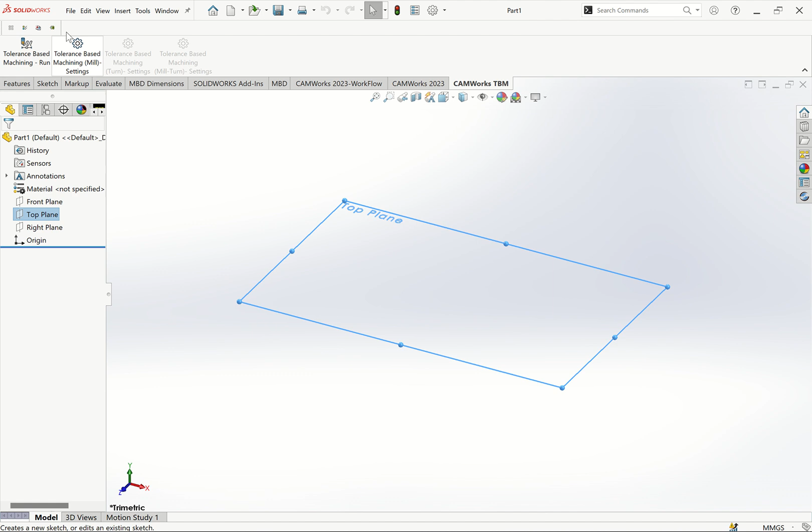Once you open your SolidWorks, I'm using SolidWorks, that is the software I'm using for design. Quick way, just file, new part, or shortcut, click Control N. SolidWorks is able to do part modeling, that is 2D and 3D modeling.

You create 2D sketches, and then you convert to 3D sketch, then 3D models or features. Then you're able to do assembly from part modeling. You're able to create a 2D drawing from either part or assembly. But now we're doing part modeling.

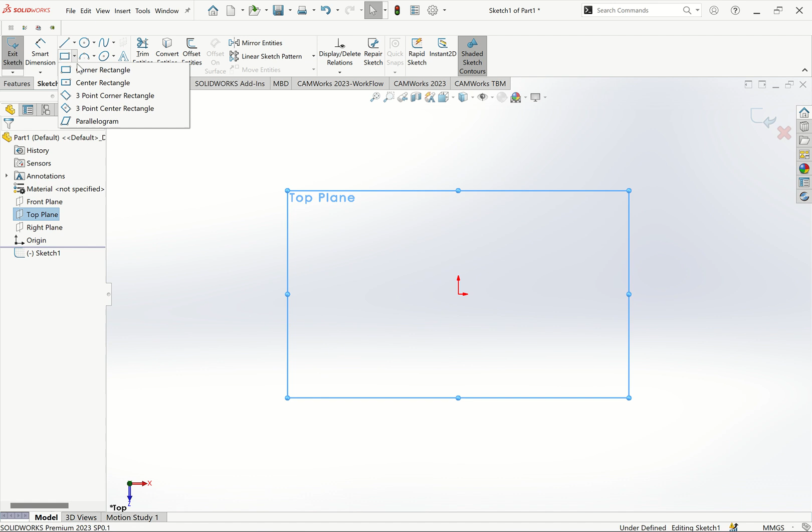Click on top plane sketch. We want to do a faster way of creating our part here, so let's put dimensions very quick using smart dimension. Here we put 1200, that is in millimeters, by 600.

You can put a simple support here. Simple support is okay, you can exit this.

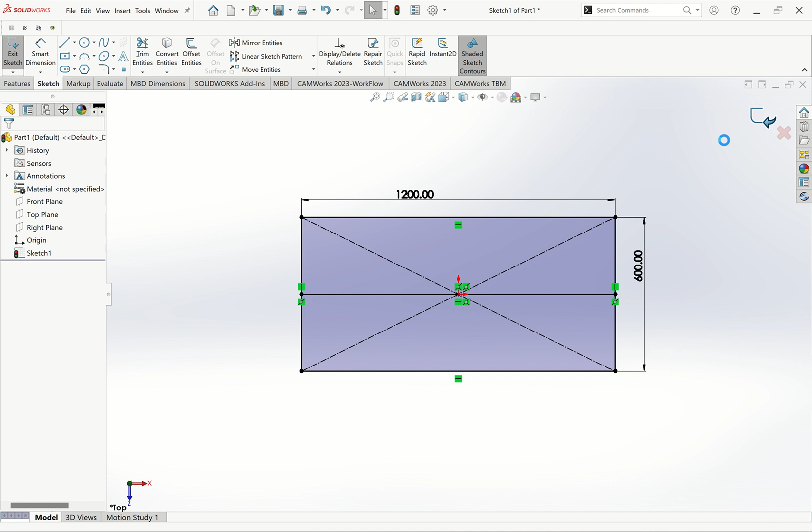That's the 2D sketch. Then you go to 3D sketch, combining them. Come to sketch again. First of all, once you finish here, make sure you click to exit from the sketch. Then Control 7 to see this is our sketch. Then go to sketch again, and down here under sketch, click 3D sketch or select 3D sketch.

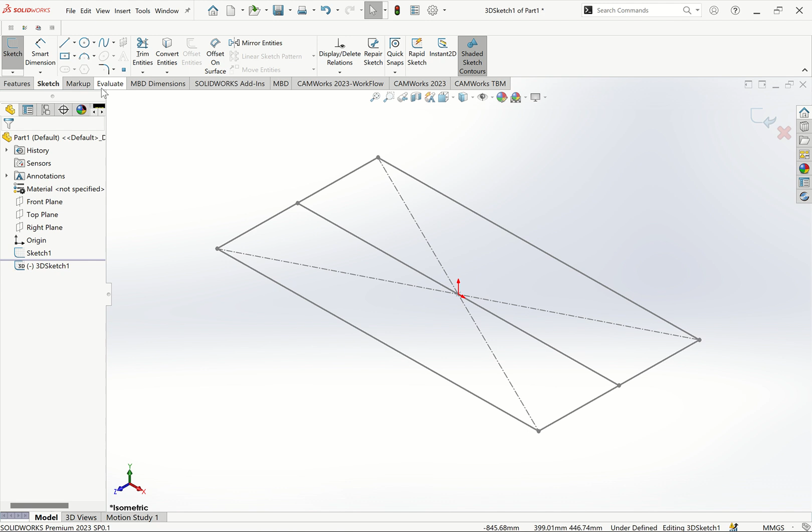Then take a line. I told you we want to use 2D sketch and 3D sketch combined to create a simple table frame, and then we see the power of SolidWorks, how SolidWorks is very powerful.

When you're using 3D sketch, you can click on the point you want. You take a line, you click on the point you want, and use the tab command to change the orientation of the line or the sketch.

So click on this one, this one, hold on Control, I want to make them all equal. Hold on Control, select this, select this one, select this, select this one, then release the Control button. Then pick this one as equal.

Press F button, take smart dimension. On this, you can put the height 700. This is a start table. Then you can put a support for the start table.

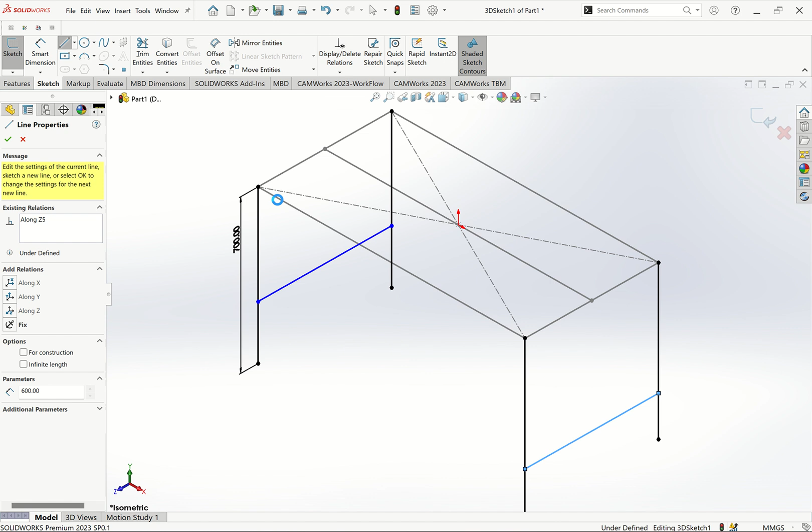Maybe click on this point, any point, then ensure you tap so it goes this direction. And pick another one this side, maybe from here, let it go this way up to there. Then the last one, maybe from here, you can tap, yeah, like this, it comes here. So you can smart dimension our part from this far end to this far end.

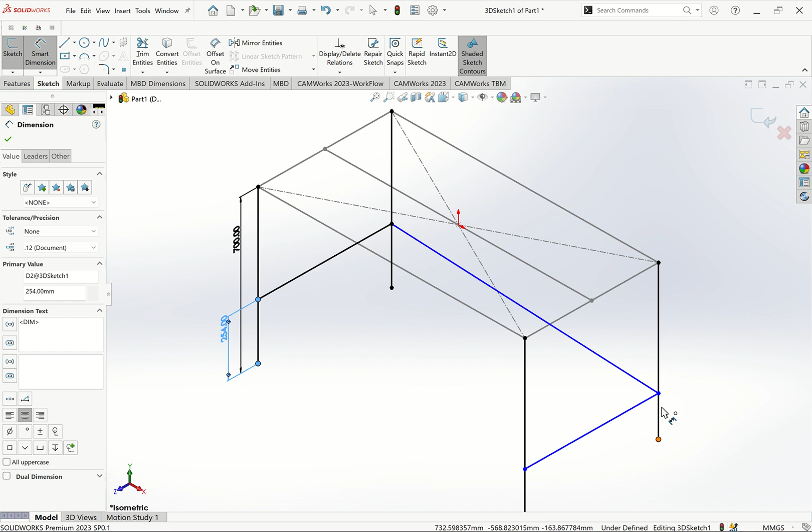You can put it like 254, from here up to here, the same. You can put 254. So your sketch is fully defined, you see here it is now fully defined.

Then what you do is just exit. So you have combined a 2D sketch and 3D sketch, that is making a table. Then we need to go to...

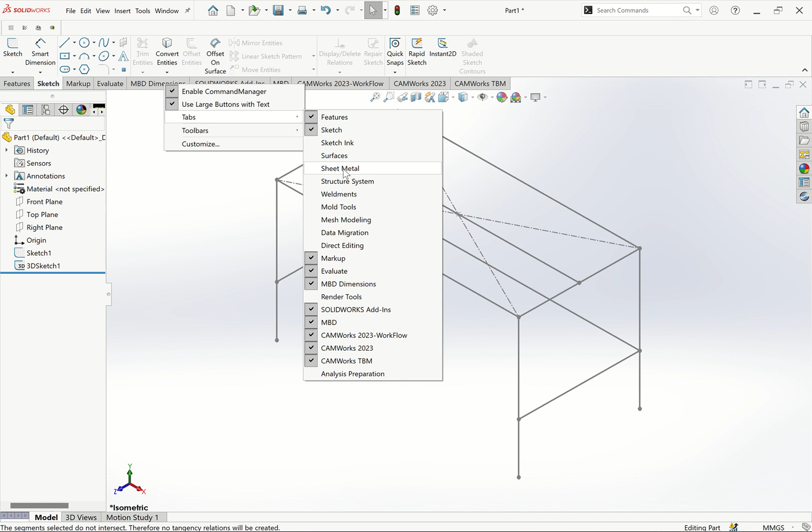Weldments, it's not here, that's structural. So what you do is place the pointer here, right click, then say tabs, go to sheet, that is Weldments. We're using Weldments. When it comes here, you click on Weldments, or you click on Weldment again, then structural member.

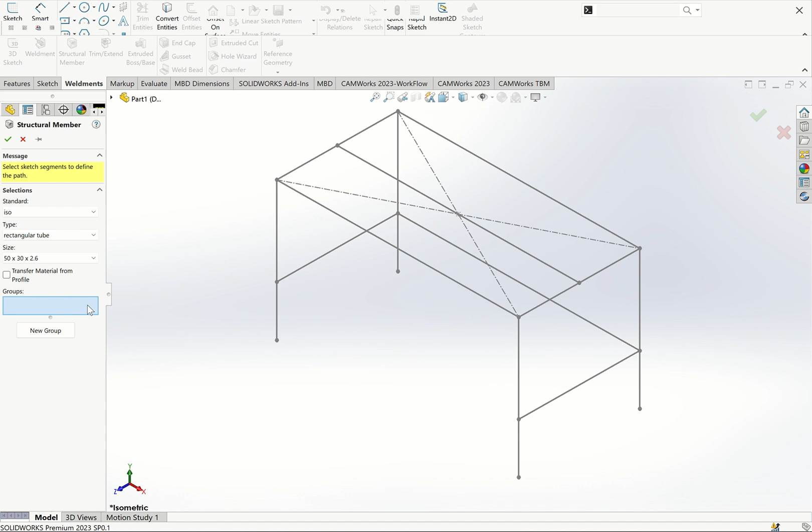Check the orientation, so this is the orientation. If you don't want that one, you can rotate. You click here, then change the angle, maybe 90 degrees, you see, then click new group, add this.

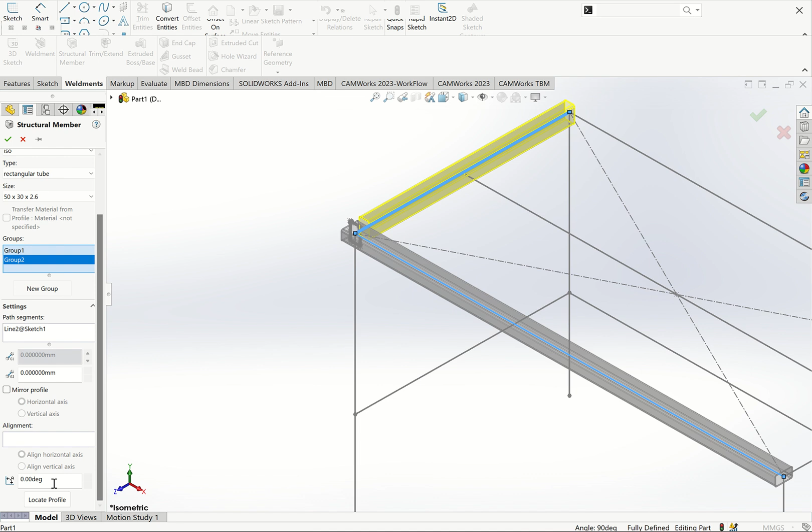If you don't want the angle the way it appears, change here to 90 degrees, like that. New group, so that you create a cut list. Change this one, change orient it to 90 degrees, like that.

Then the last one, new group, pick on this, like that. You can also change to 90 degrees, like that. Okay, then you can pick the lower one.

This welding table should be strong, can you click new group? That's why I put this support. Then this one I can also change the angle, I can put 90 degrees, like this. So you see how it appears.

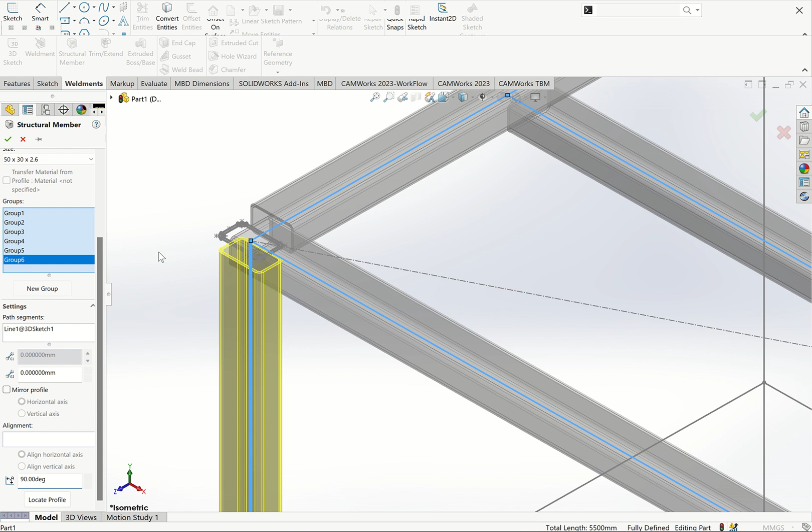Then you can put new group for the legs. You want it to appear like this? It's not good, maybe I can change the angle to 90 degrees. That is good. If I want to see it, Control 5.

I want to see at this corner, how does this corner appear? If you feel it doesn't appear the way you want, what you do is first treat these corners. Click on this far corner, then you can use this arrow to trim the far corners.

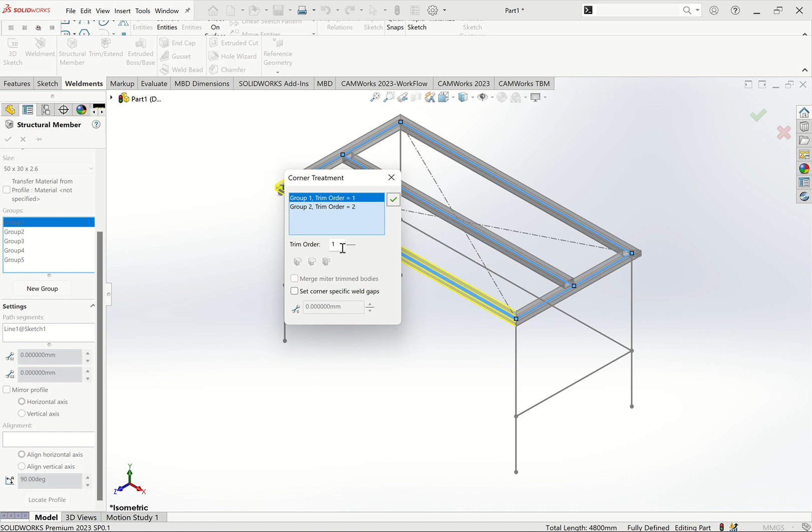You can use this arrow to trim the far corners. We call it corner treatment. Use these corners to treat the corners. We have this, so click on new group, then pick on this handle.

Before you change, Control 5. Check if you want it to be like this or you want to change. For example, if I want to put 90 degree here, I click this, it changes like this. So I want to fit it there. Can pick another one.

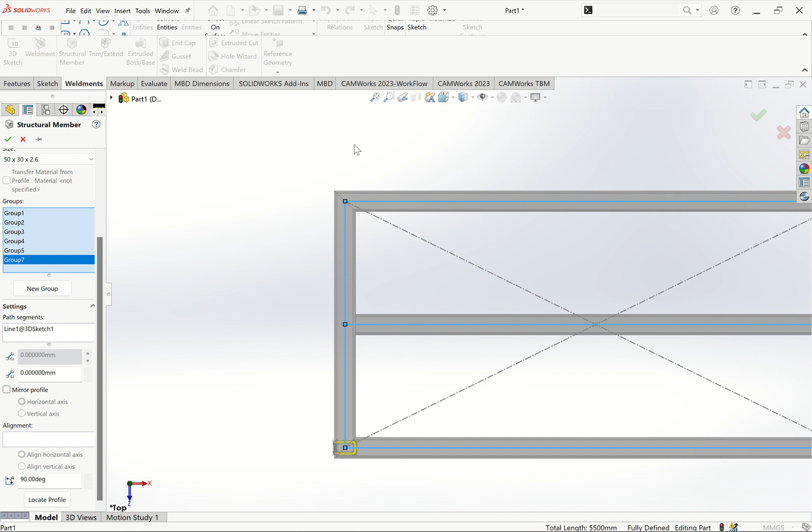Control 7, new group, pick this one. I want to see how it appears. Control 5, top plane. So this, I want to also change this one to 90 degree. It goes inside like that.

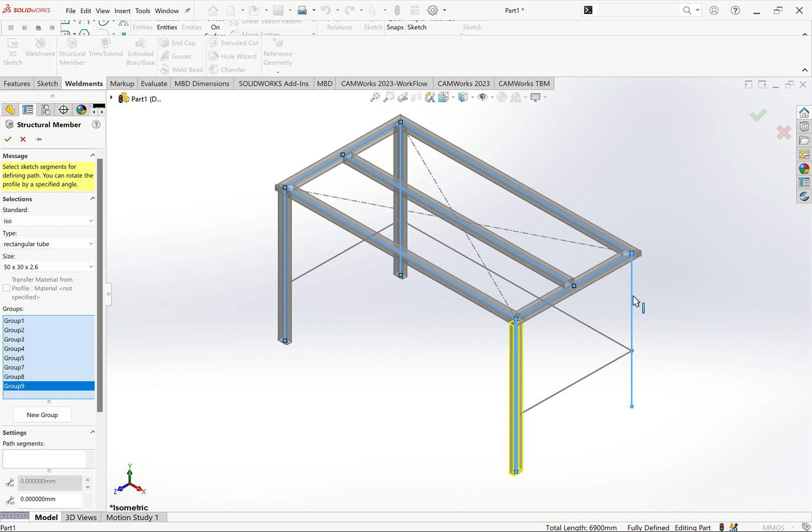Control 7, I want to change a new group, this and this. When we combine them, Control 5, I want to change this one to go inside the 90 degree, like that. Control 7, so I can put another new group.

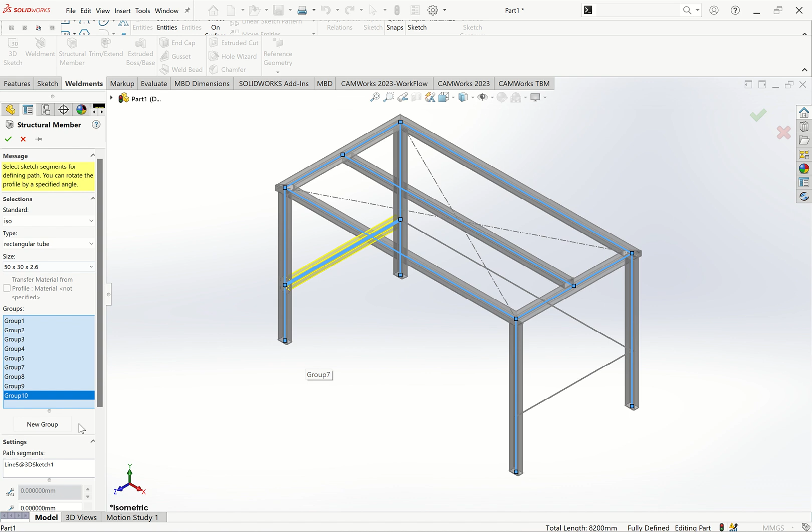Control 1, so this one is okay. I need to rotate. New group, this, Control 1, this okay. New group, this one, Control 2, 3, it's okay. So you see this one is okay. Then once okay, click OK.

I'm able to hide this sketch, these sketches, I can hide the sketches. And then now this is our table. You can check if it is well treated, each one of them, if it is well treated.

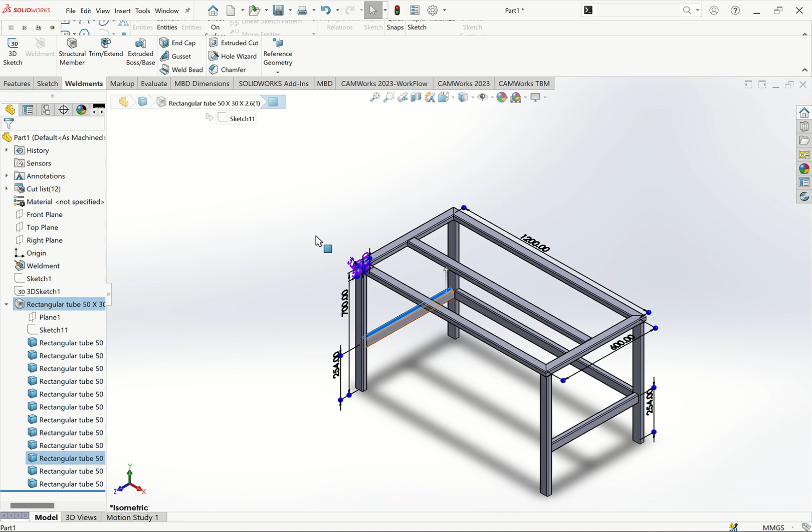For example, if I want to add other features here, I can come to my 2D sketch, so edit the sketch. I can add another sketch here. This sketch, I can add another sketch here, for example. Maybe let me put a simple sketch here. I'll show you, then another sketch here.

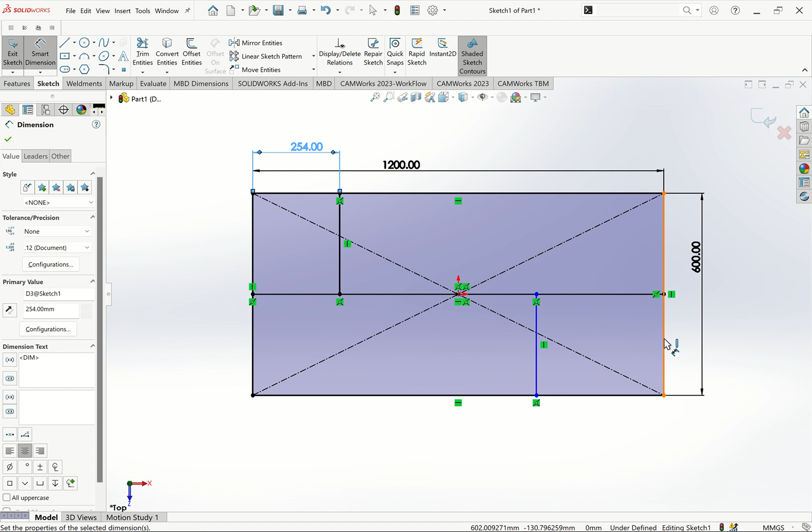There's a reason why I want to show you this. This is a very good trick. So this is 254. Also this is 254, that is 10 inch. 254.

Exit. Okay. Once you exit, it doesn't come here, so unless you show it, click here, show. The sketch will come. And then I want to add something here. Then I show you how to trim. So what you do, click here.

Structural member, I want to use a square tube of 30 by 30. Yes. Then click on this. Then this one and this. Click OK. Then come here, hide this sketch.

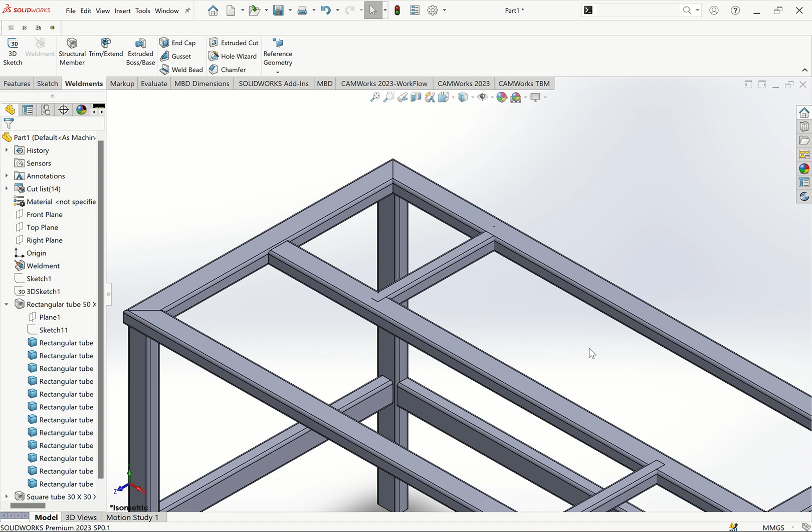You see, this part, it's elongating inside because this material and this material are not the same. This is that square tube of 30 by 30. This is 50 by 30. If you look at this one, is protruding inside.

So what do you do? You come to trim. Then I want to trim this one, but I want to use bodies. So click on bodies, then pick this body and pick this body. So I want to cut. This is the one I'm keeping. Yeah, I'm keeping. If you click this, it removes.

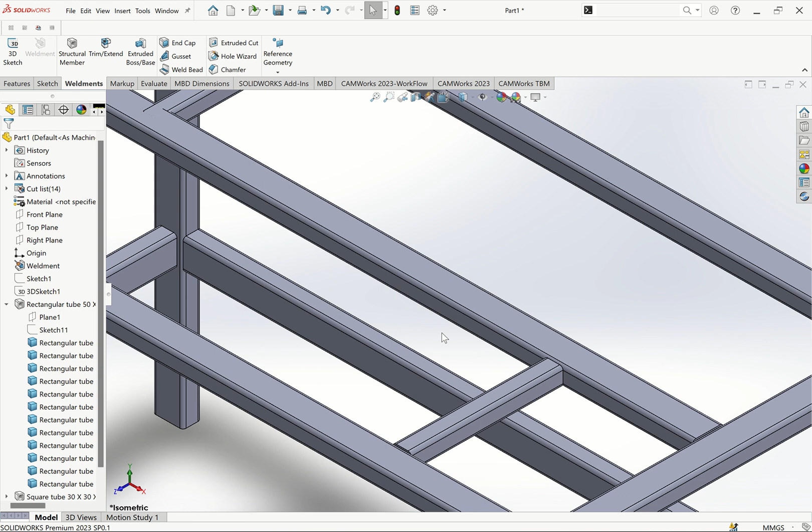But I want to keep this, so you click there, you keep. Click OK. You see, now it has cut the joints. You can also come this side, trim again. You can pick this what I want to trim, change to bodies here, pick this body, and you click OK. So this, it has created what we call a cut list. This is a cut list.

I'm able to put at the top, at the end of it also, to prevent it being sharp cut in the floor, I can put what we call end cap. These are the end cap. Put end cap, click on this face, and end cap.

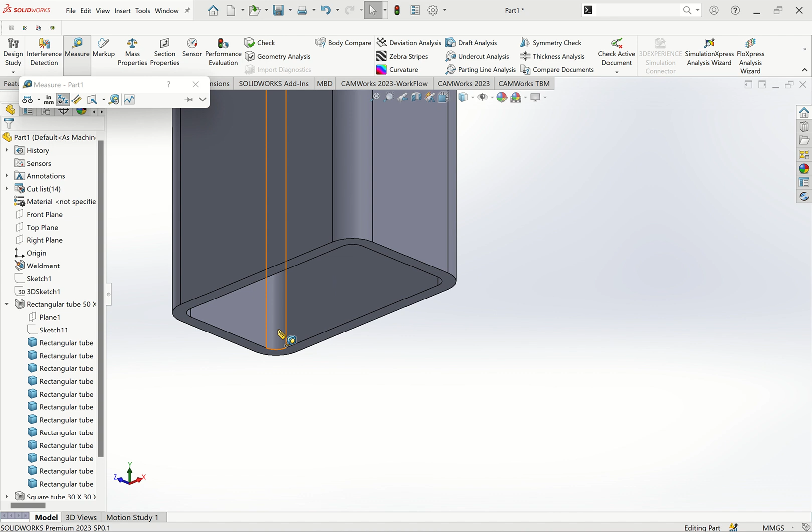Maybe if I put end cap, I can do symbol evaluation, measure this radius, and put it 2.6. So I can just come to Weldments, end cap, pick this region, then I say corner treatment, fillet of 2.6 to be inside. Then I can change this one to be inside or this.

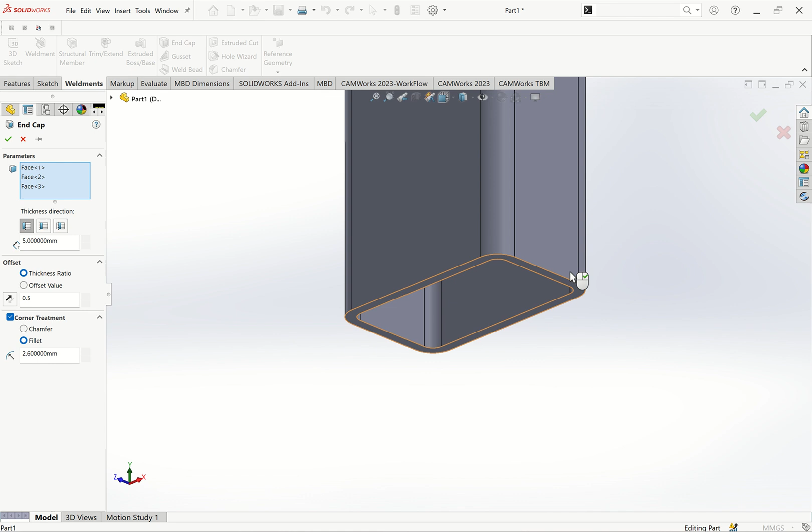So either way, that suits you. So in case you want this one to flash out, okay. So let me use the flashing out. Then you can also change this, pick these ones, all of them, one by one, until I have the end caps. Yes, pick this and this.

Okay, I can also apply material. Come here, edit material, apply material. I want to use alloy steel. Apply, close. Then you can save your table frame.

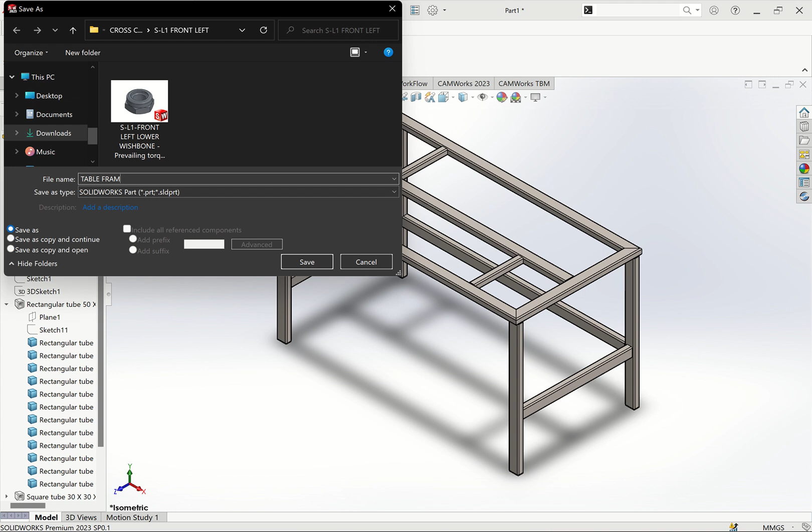Okay, so this is our frame. So we have done a design. So in case you want to add wood on the other side, you can do that one. That's what I wanted to show you, how you can combine 2D sketch and 3D sketch and then you design.

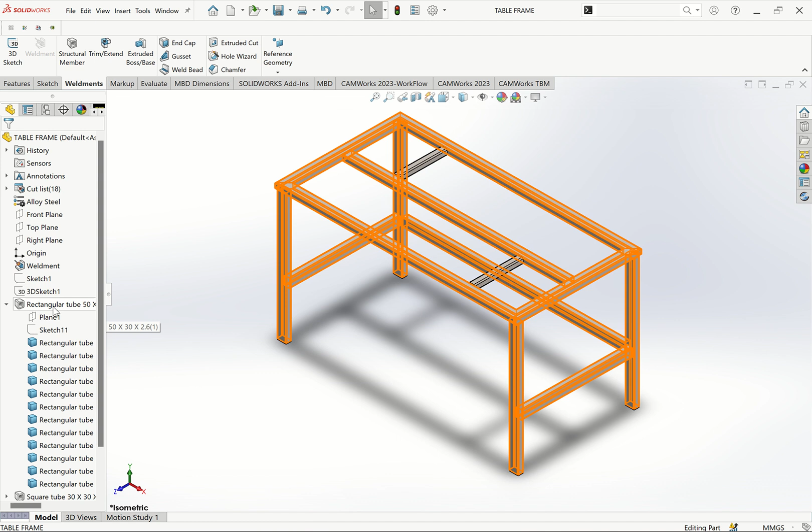Also, this structural, if you look at this structural, what you have done, for example, you click on structural member. Here, for square tube, let's say for rectangular tube, we only have this size.

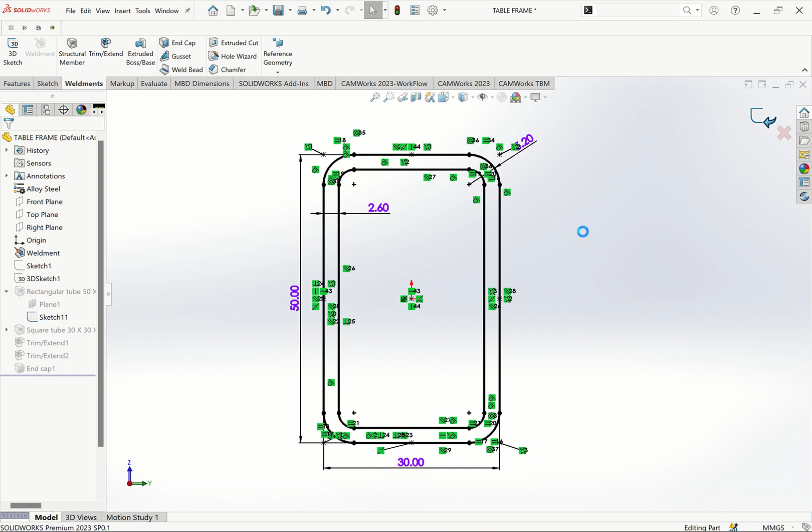In case maybe you only have 75 and maybe 50, it's not there. What you do is come to this sketch, then click edit. You put your dimensions. This is the profile for rectangular, we call it RHS, rectangular hollow section. So you can change this 75, you can change this to 50. Then click exit, and it will just update the dimension all across. So this is the part of design.

From here, I can also do an analysis. For example, let's do a simulation. We'll see what an analysis looks like. We want to see how this will behave in case I'm going to put a load of maybe 10 Newton or 20 Newton. Let me check the simplest way I can do an analysis for pressure or for force. If I assume I'm not using a beam, I can do a simple analysis to see how much it will behave when loaded. That is what I'm going to test after finishing our simple structural design. That is the beauty of SolidWorks.

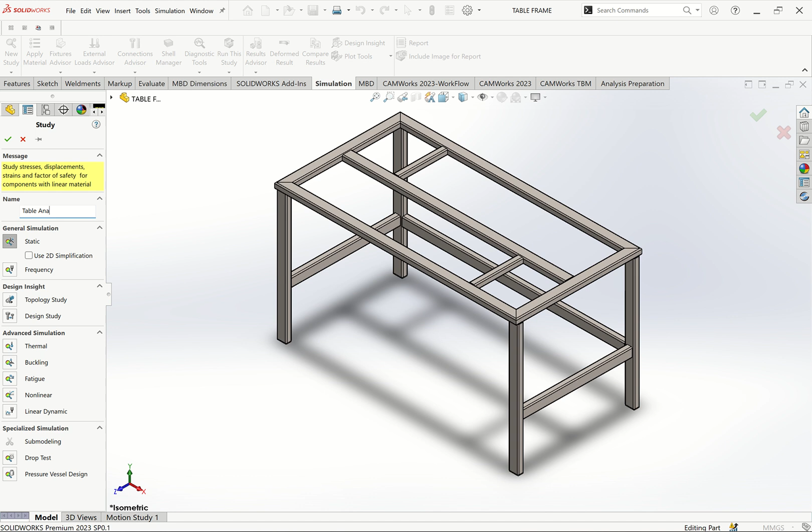Okay, so let's go to simulation again now. I think it's still loading because I've just activated simulation. So let's go to simulation, then click new study. You can use an advisor. I just want to say table analysis, stress analysis.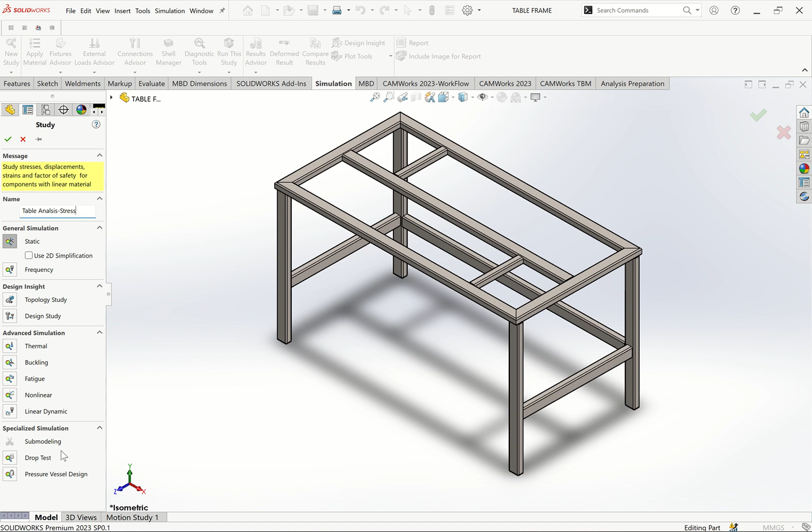In this analysis, you have 2D, I can use 2D static. You can use thermal analysis, buckling analysis, fatigue, nonlinear, linear dynamic, submodeling, whatever. But I want to use static analysis.

Then click OK. From there, we know you have applied the material. So the first thing is you need to apply a material, but already you have applied the material.

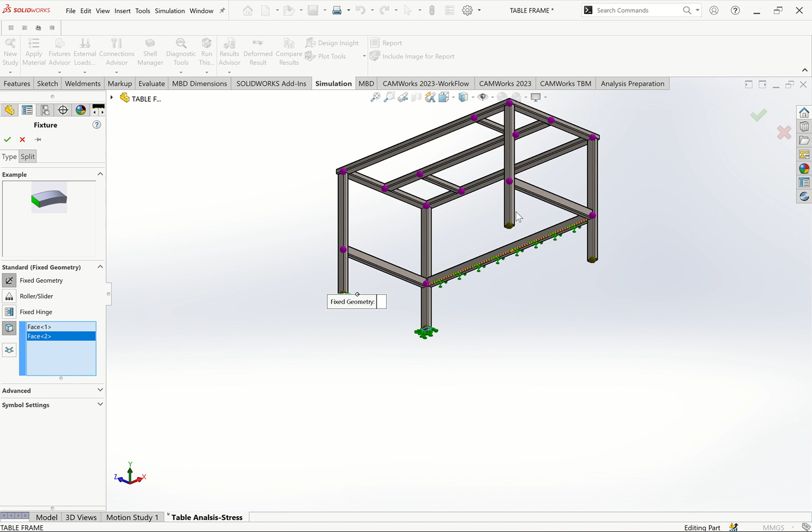So you can go to fixtures. I want to support the lower side so it doesn't move. This is the place I want to support, and this is the place I want to support, and this is the place I want to support. Okay, then I click OK. So the table will be standing on the ground, so the support is on the lower side.

Then I can come to load. I can use force, so I don't pick the beam, or I can use pressure. Let me check pressure.

Normal face, I can use top plane. Reference geometry, let me use the top plane. Reference geometry, top plane. Then I want along which direction, maybe direction 2. You see, if direction 2 is going this way, let me check direction 1. Direction 1, direction normal to plane. Normal to the plane would be like this. So direction 1, like this, is not good for this part.

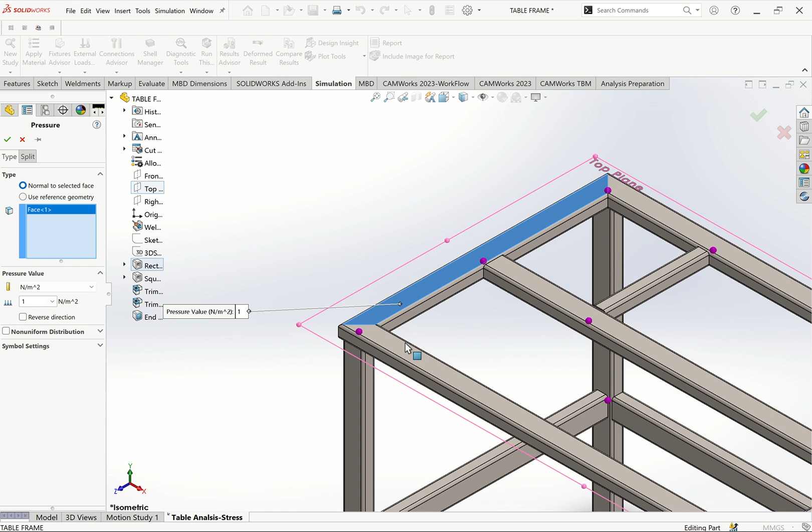Select faces, I want to take these faces, these faces. I want to ensure that the forces align on this. Pressure is being exerted on these faces. Yes, like that.

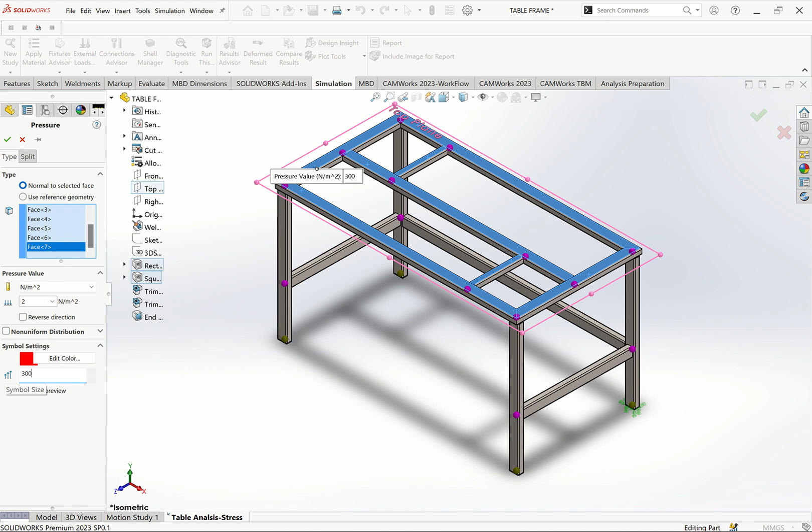Just let me use 2. In case I wanted to change direction, I can also reverse here. Then I want to mark a factor of 300. You can see the force, yeah 300, it's too big. 200. Okay, 200 is okay. You see, that's why I didn't want to use pressure, because it will require me to use the beam.

But I want to do it very fast. So what I want to do is I will have to change this one to the beam, and yes, I've used that pressure. You see, pressure requires you to convert to a beam. I just wanted to use this.

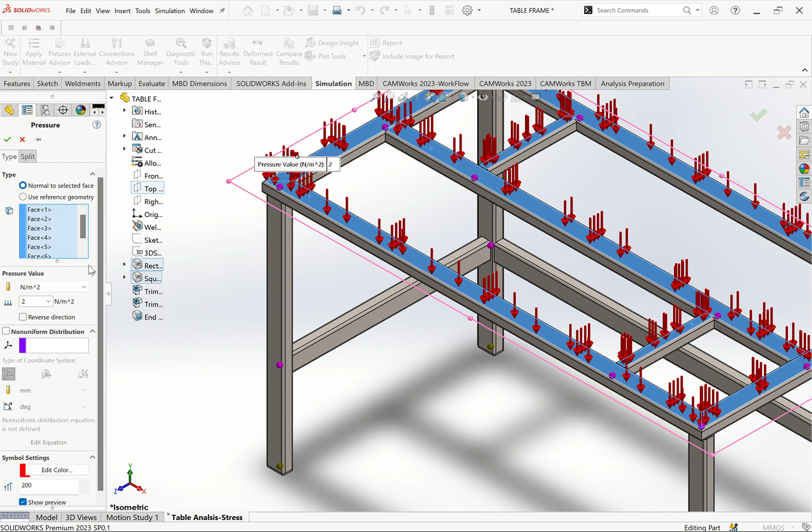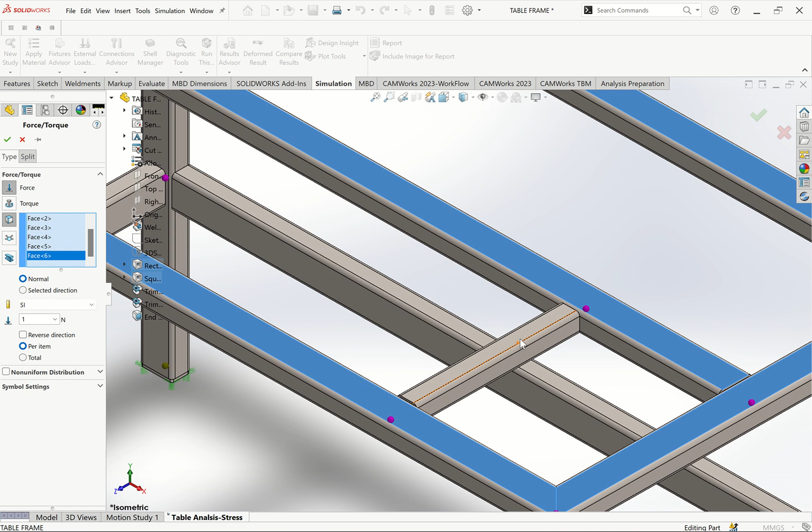So let me put the load as force so that I don't take too much time for this preview. I just want to see how it will behave. So let me use the force on these faces, not the pressure. I just want to see, in case I'm putting a 20 kg bag on this frame, how will it behave? Or in case I'm putting heavy machines on this table, how will it behave? I'm using weight, that's Newton. Let's say somebody has put 100 Newton on the frame, what will happen?

Okay, I can also expand the symbol. It's normal, you can make a symbol here to be 200. You can see the pressure, the force, yeah 200, I can able to see it. Okay, then I can put OK.

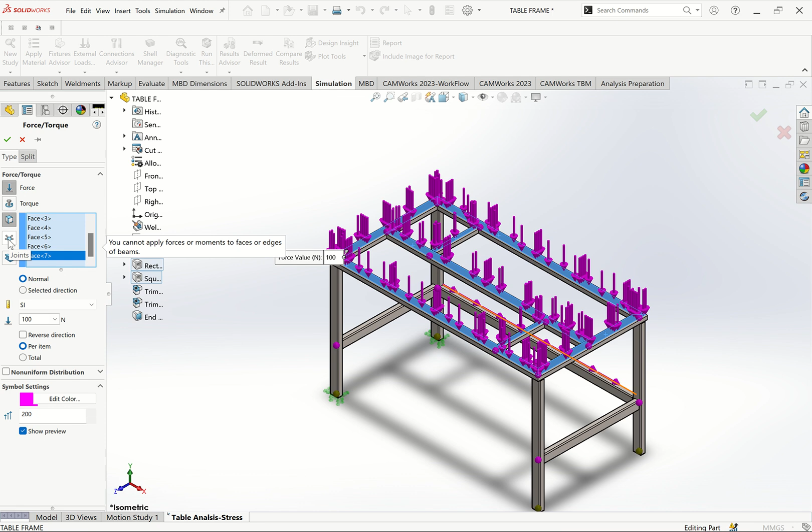Let me apply on the edges. Why can't I apply? Let me apply on the joints. In that case, let me apply on the joints. If this is the case, I can apply on the joints now, that will pick the joints to take it as a beam. So I'm applying on this beam now. It's okay, and then I want to use force.

Let's say force of 50. 50 is okay. Then I want to use this force. And then the selection is the top plane.

You see this force, it is going the wrong side. So what you do is change this, pick the other one, preview like this. So you pick the last one, preview like this. You need the last one, that is 50 force, so it should be this last one. So when you preview like this, okay.

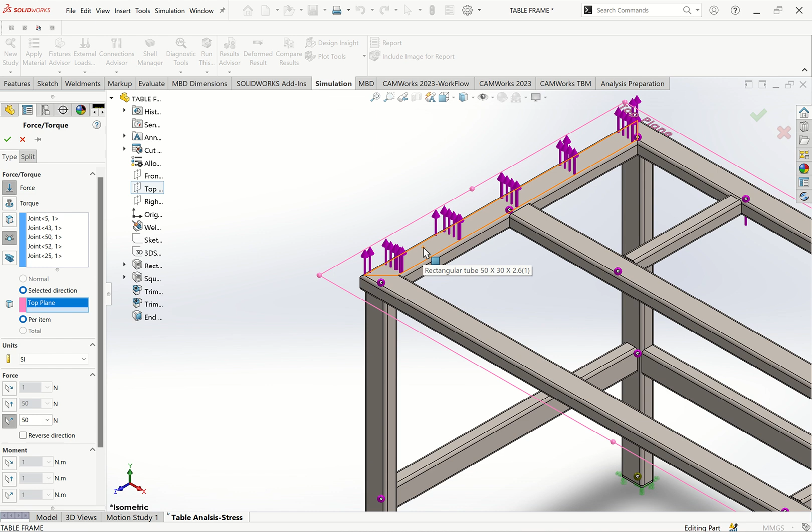Yeah, it is going down up. I want it to point down, so you can reverse here. It points down like this, you see.

Okay, then you can check that here we're using a reference plane as the top plane. Then I've put a factor of 200 to magnify my force. Can now pick OK, that one. Then from here, I don't have any connections.

What you do is I can create a mesh. The finer you put it, the slower and more accurate the result becomes. So let me mesh first of all, okay, create a mesh.

After meshing, it takes time. That's the problem with meshing, because I've put it so fine, that's why it may take a lot of time to do meshing across regions. And also remember, I've not done welding, so in case I do welding, I also ensure that the accuracy of the results increases. But let me do it first, and then I'll check, I'll add welding, then I'll see if that contact area will affect my result.

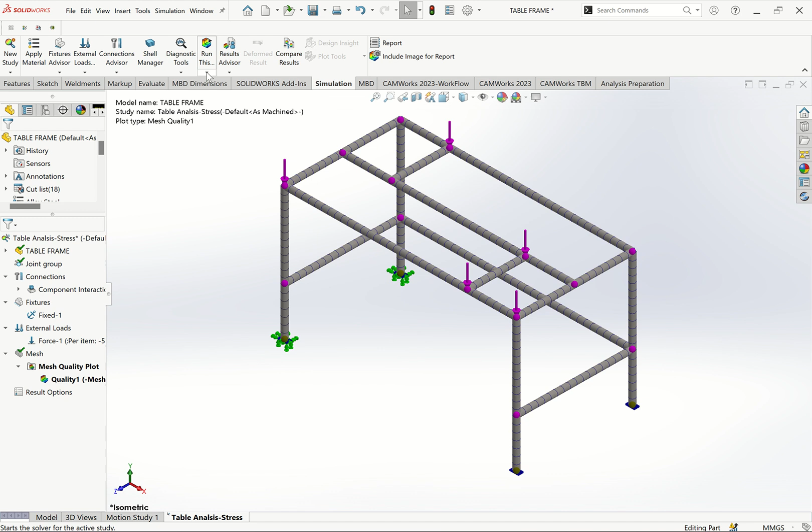Okay, then I can go to run now. Come here, run this study, click run this study. We'll be using all CPU. So let's use all CPU to run this study.

So we're using what we call the table analysis of stress. Yeah, it has finished. So this is the behavior. The material has a yield strength of 6.204, times 10 raised to power 8. That is what we have for the material.

So if you look at this chart, it tells you that every time it is changing almost to red, areas that are changing to red, it may be close to approaching the yield strength, which is very dangerous. So those areas are the ones you focus on to reduce the stress relative to the yield strength.

Okay, we can also check on displacement. For example, show displacement, this is how it behaves. You see, that's why I wanted to put this one, to see how it will behave. So here it is stronger as compared to at the center.

So this one will help me understand where I should put more support. If I animate this, I'm able to see the effect of loading, which will be more at the center than at the far end. So what I will do is at this center, which means I need to put a support at the center in case I want to confine my design to use the 50 Newton weight.

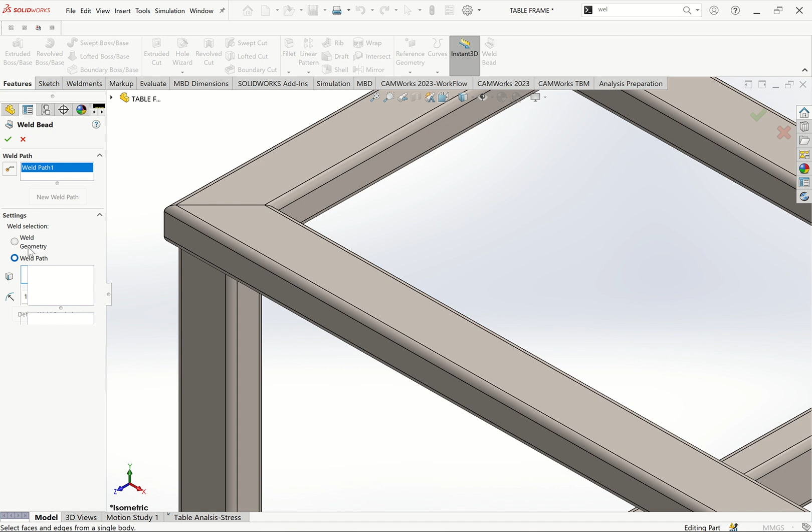So I can pick this face, yes, give a gap, maybe this face and this face, or you can use this one. You can pick this face, click here, pick this face. Then you see this is the weld.

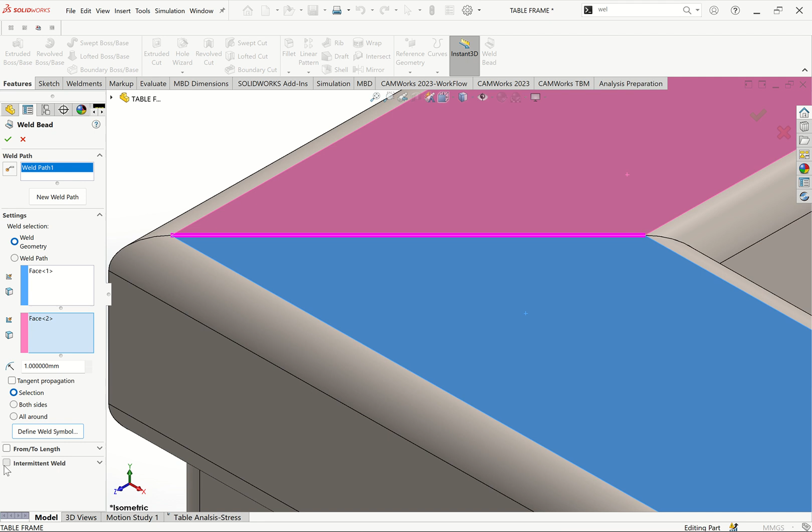So you can define your weld, if you're coming from which point to which point. You can change, you put the symbol for the weld. You're welding both direction or selection, also doing intermittent weld or normal weld. So these are part of the things you can do. For example, if I click on this, then I come to my table analysis.

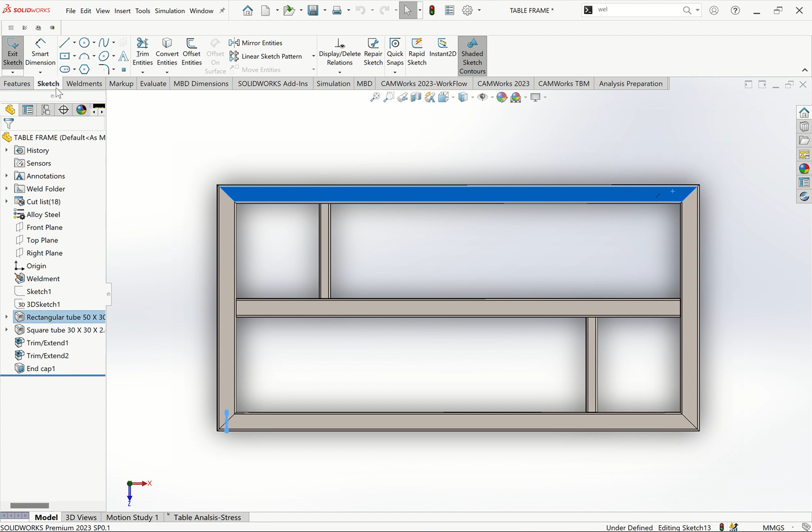I can also do an analysis again. In case I need to do any change here, let me assume I have done this, for example, sketch something on top. I want to show you what will be happening on my design.

I want to put this, maybe, for example, I can measure this one. Let me go to evaluate, measure, and measure this.

This is 1200, so I can come here, sketch 1, 2, 3, 4. So I can say from this point up to this point we have 1200 divided by 4. From this point up to this point is my dimension again.

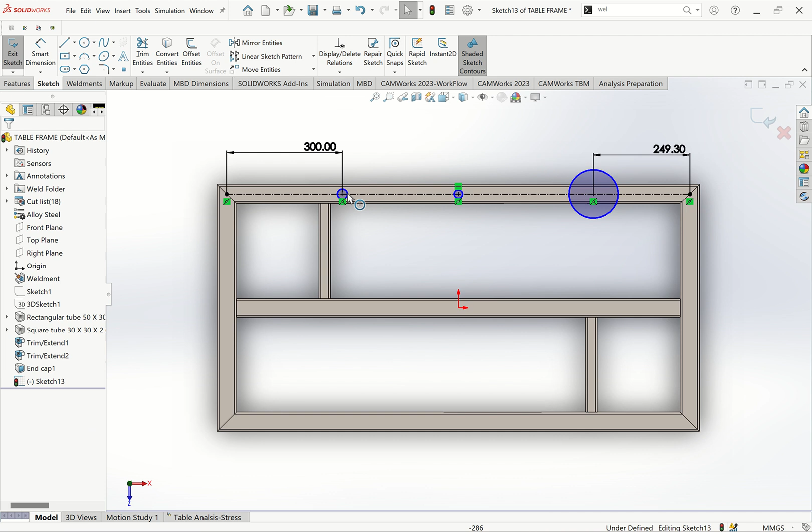Up to this point equals to this one. Yes, I pick this one to use equations. This 1200 divided by 4. Then this one and this one are equal. They are equal. This is the diameter.

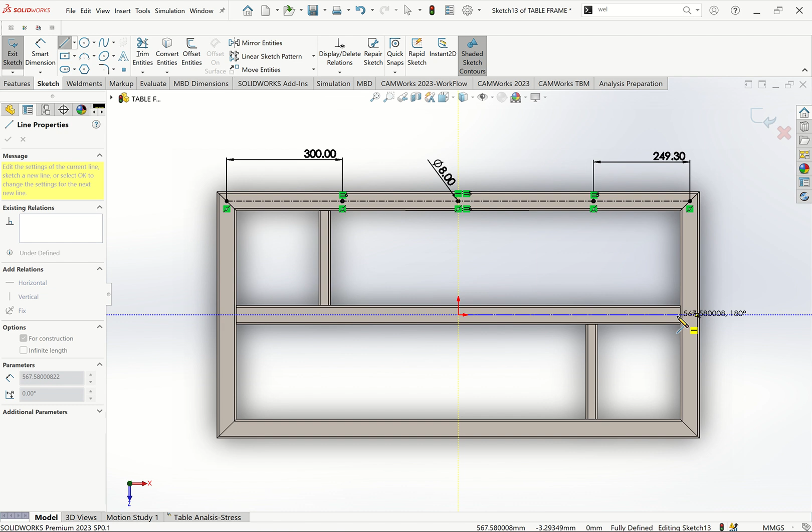Let's say diameter 8. Control 8, and put a center line here, at the center. Can click here, mirror, copy this, mirror about, click this.

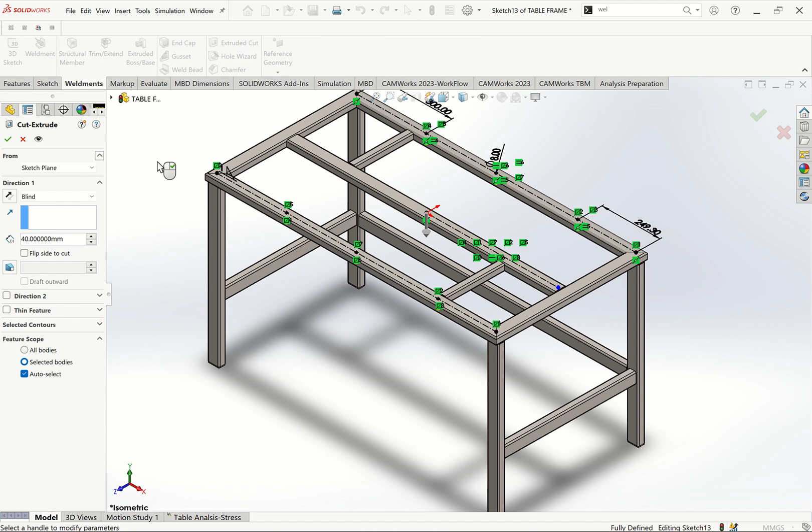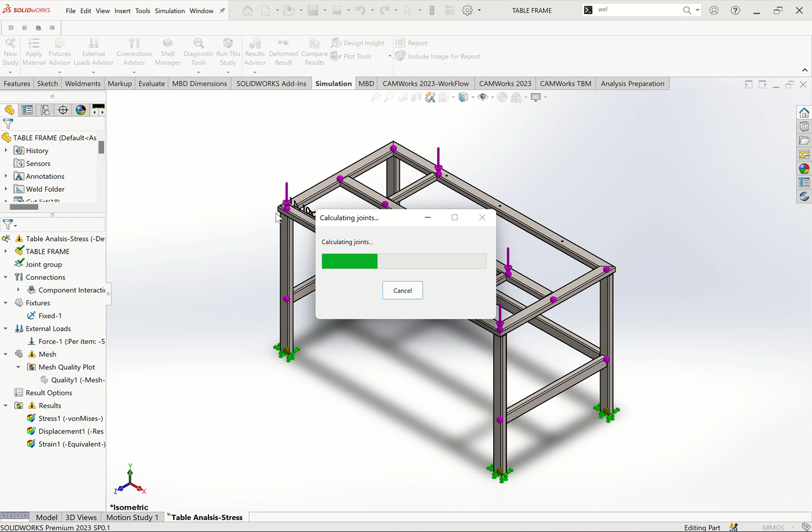Then this is now recalculating the joints. You see, it is telling you to calculate the joints. You can save or click here, rebuild, then go to your table analysis. You see, it is recalculating the joints. Then it is putting the question mark here.

Why? Because I've made a change. So what do I do? Click on this one, right click, and then say run this study or update. Can click on update or run this study. So you can update, create a new mesh, then it updates. That's how you do a design before you make the product.

But there are changes I've not made. So while I was doing my design, I realized there's some changes here, so I didn't finish those designs. Okay, so almost finishing, it's taking time, but it's almost finishing. Don't worry, because I've put fine here so that it can give me the result I want. Okay, so this is what you have obtained.

So if I show this displacement, I want to see this color. See this color now, so it's almost changing. But what do I do? So this is the area I will go in my design. I'll come in here in my design. I put a support at this center.

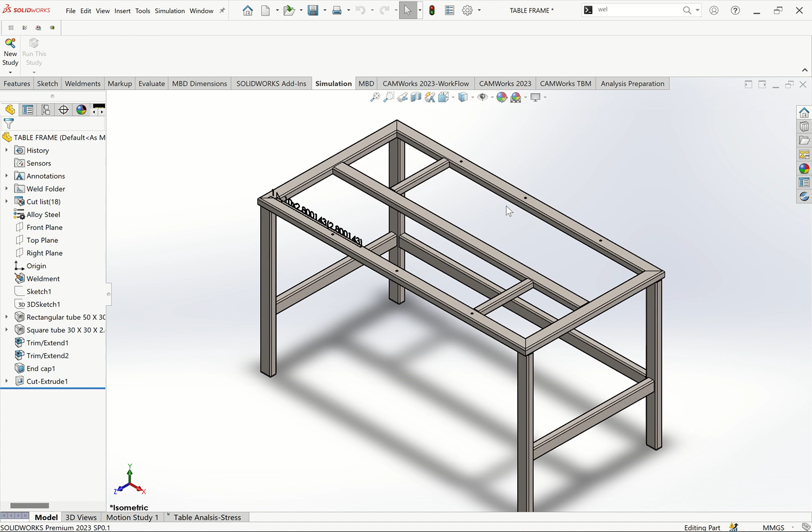Which means I can say now, edit the sketch. For example, can add this at the center, maybe this point, from here to here. I want to edit the sketch, then put this somewhere here. Put this one somewhere here.

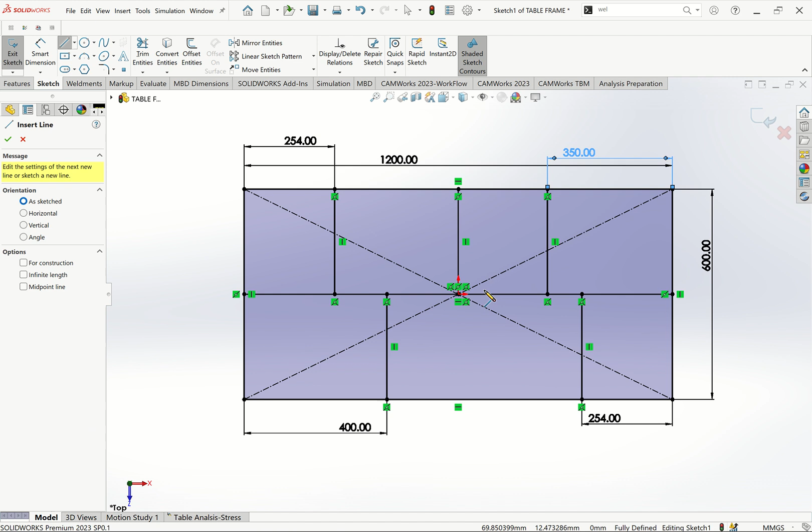Can put my dimension, maybe from here to here, can be 400, for example. This one up to here, it can be 1 foot, for example, or even 350. The reason why I want to do that, let me show you why I'm doing that. How will it affect my analysis? So I want to show you the effect of this.

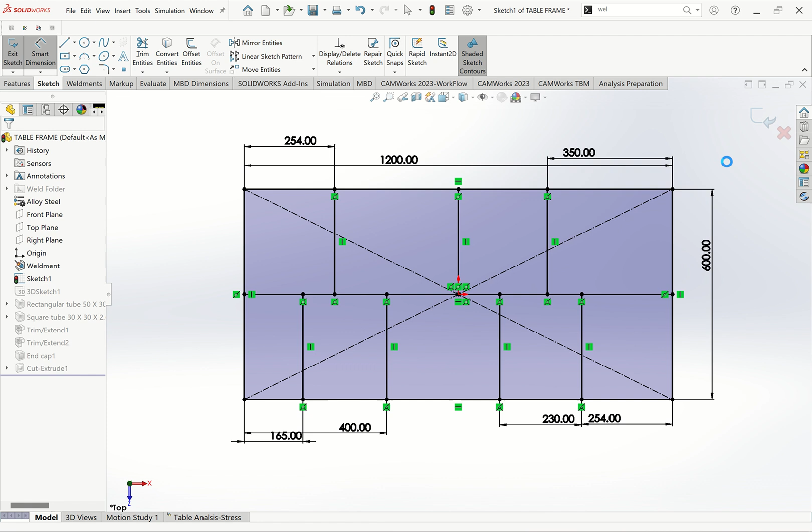So smart dimension, so you can take these ones, it would be just 165. We'll change them, don't worry. So put this one maybe 230. Then you can exit, Control 7, and then it is recalculating the joints, remember, because we are doing analysis.

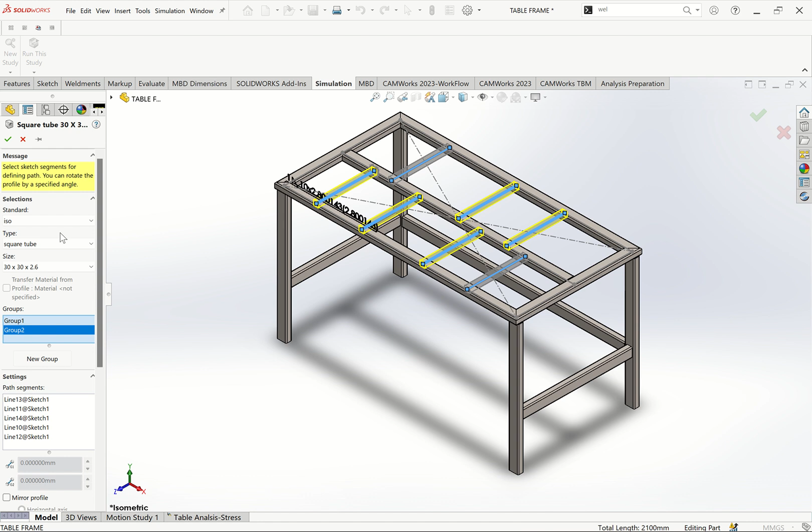Then I'll come here on this second one. First of all, ensure that I show the sketch here, show the sketch. Come on the second square tube, I want to add square tube, edit square tube. Then I can add joints, so I can pick the new group, this one, this, and this. Say okay. Then let it recalculate joints.

It will give me an error because I'm adding something, so I want to see the impact of it. Okay, then still I'm under weldment, so I'll come to trim. If I trim, let me hide this sketch because it's showing me many things. I can come to trim and pick this one. This one I've added this, and to the body is this and this. Say okay.

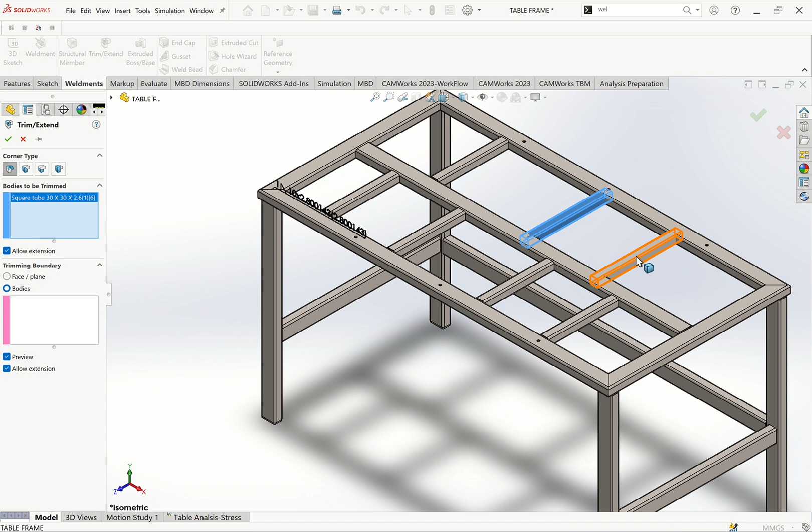Trim again, still recalculating. Okay, no problem, this is calculate. So I want to trim this and this because they are inner. Trim again, this one and this. What is to trim is this and this. Okay, the points this and this. So I have 1, 2. So I'll add other joints.

So I'll come to my table analysis again because I've updated. There are points that I had put for the force. So I'll come here on the force, click here, edit load. So I'll have to add this point, the new points. So this point, you have this point again. I've added this one, so I'm adding the points I've added, those points.

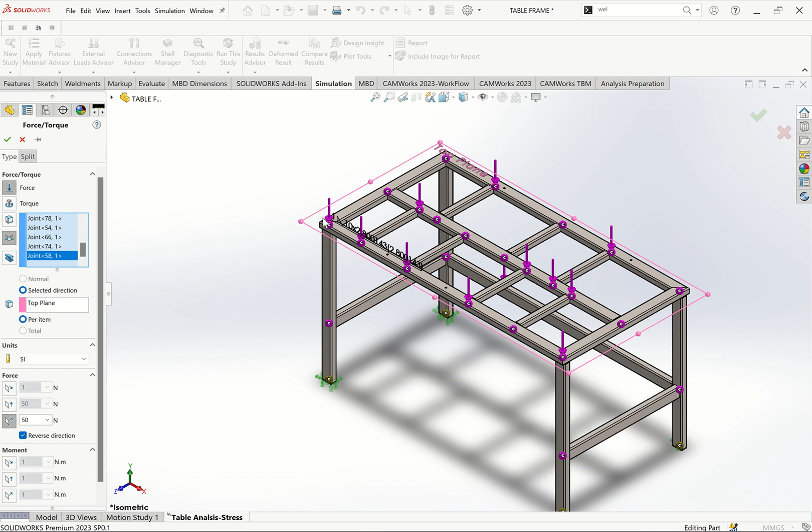Those are the points I've added. Let's count them: 1 through 19. So what you do is click here, say clear, then pick them again one by one, like that.

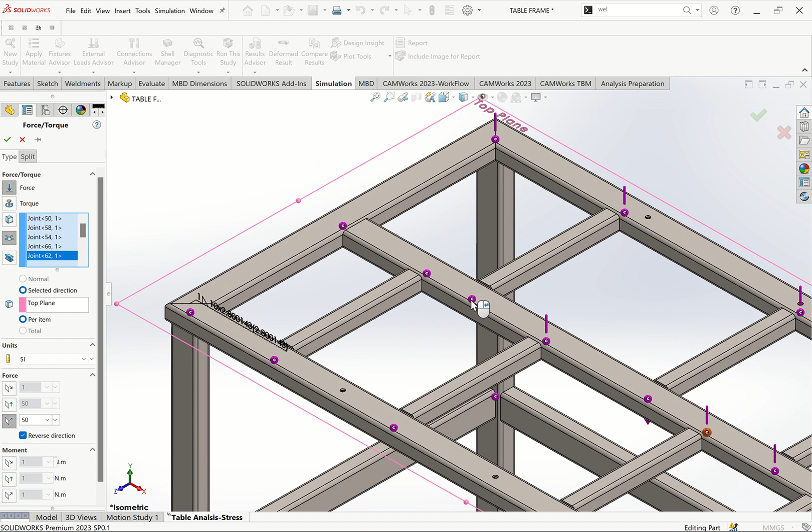Because we want to update, pick all this, these joints. The computer is taking time to think. You want to add all these points, then we see the impact.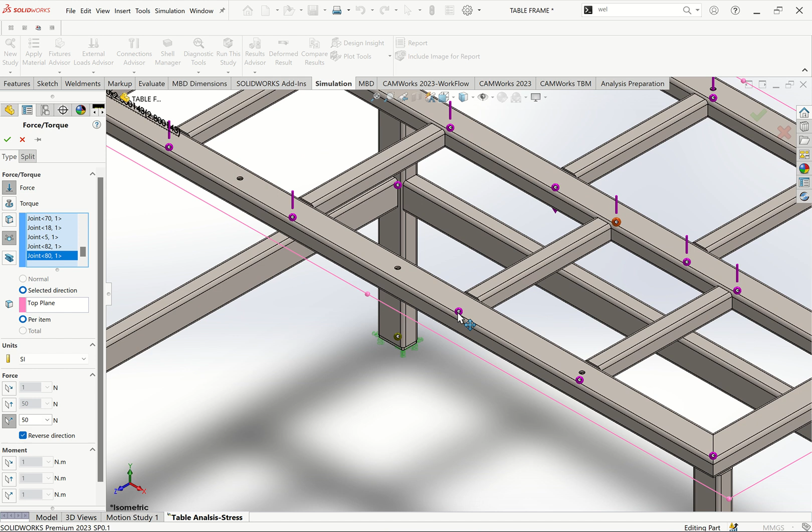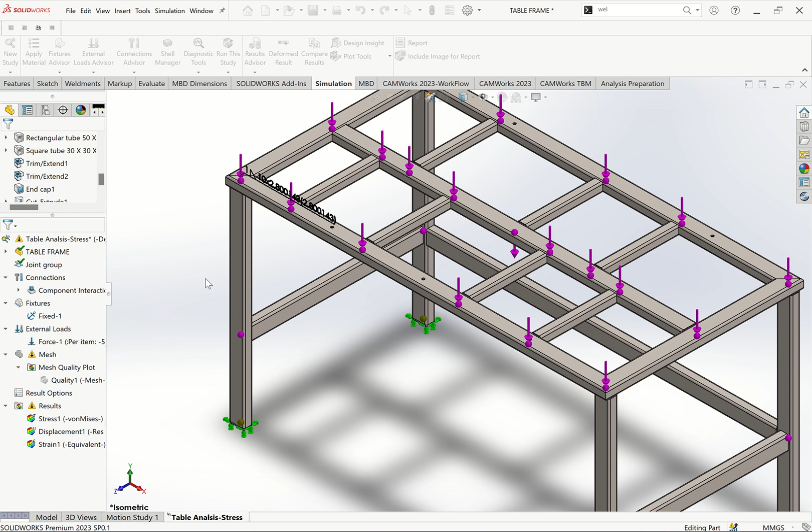So I've added all of them, click OK. Then I'll come here and say update all components, because I've made some changes. Then I can come here and say run study, so it has to recreate the mesh to update the changes.

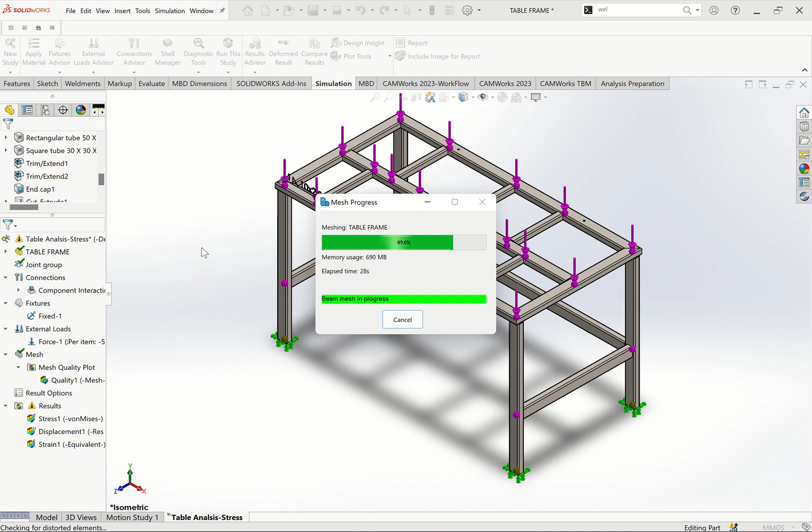From there it will now run, so we can see what changes we've made and whether it has any impact on our design. This is what we call stress static analysis. We'll be using von Mises to do the stress analysis. These are terminologies that designers need to understand when doing their analysis, so they can see what will happen.

It has finished doing the meshing, so this is now updating the stress analysis for the part. This will guide me and I will know where the weak points are. I can come here using von Mises, you see this is the von Mises stress.

Then we go to displacement, show displacement. You can see these are the more affected areas. Now the weak point has shifted to this region.

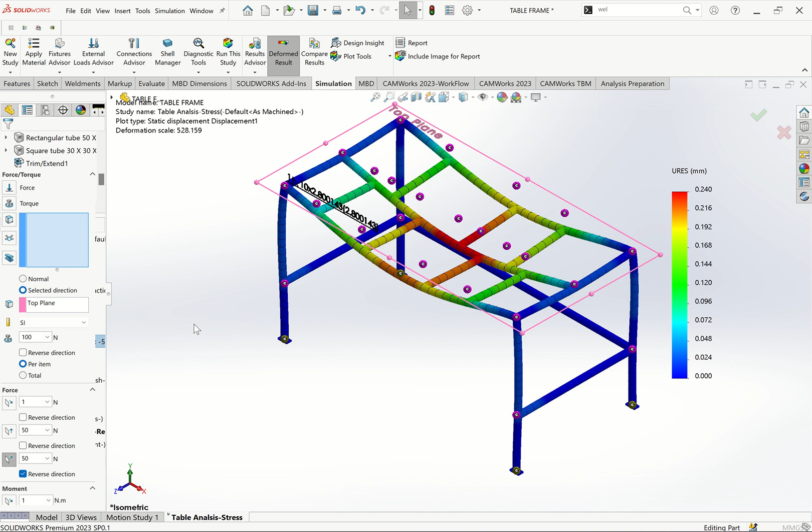Normally when you're designing it's just a guide. Why is it bending? Because there's no support going downward here. So there's a problem with support going downward. You can also change either the force applied or the material thickness.

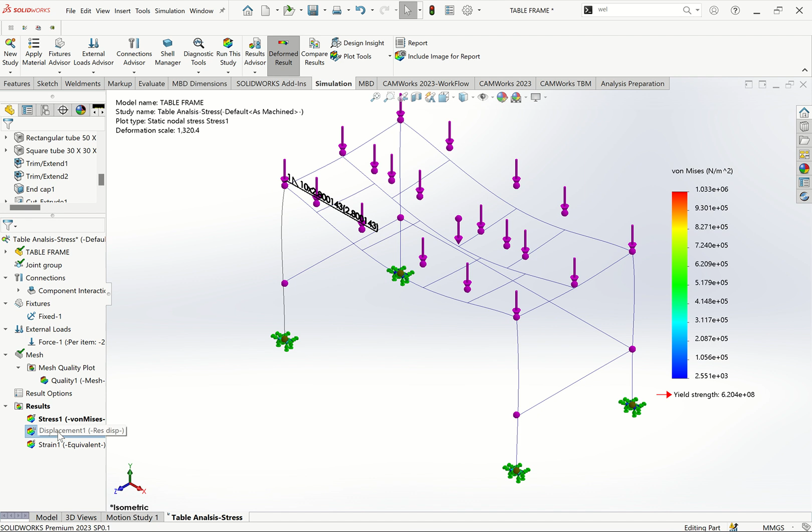Let's assume this is just a basic tutorial. In case you want to understand more, you can search for stress analysis from SolidWorks online on YouTube. There are many people who have done it, but you need to understand what stress analysis is before trying to do it using the software. You can also use ANSYS to do simulations, since it's powerful software for simulations, able to show you how to analyze your design before you make it.

Okay, you see it has changed. The reason it's bending too much here is because there's no support going down. At the far end here, there is a support going down, but here there's no support going down.

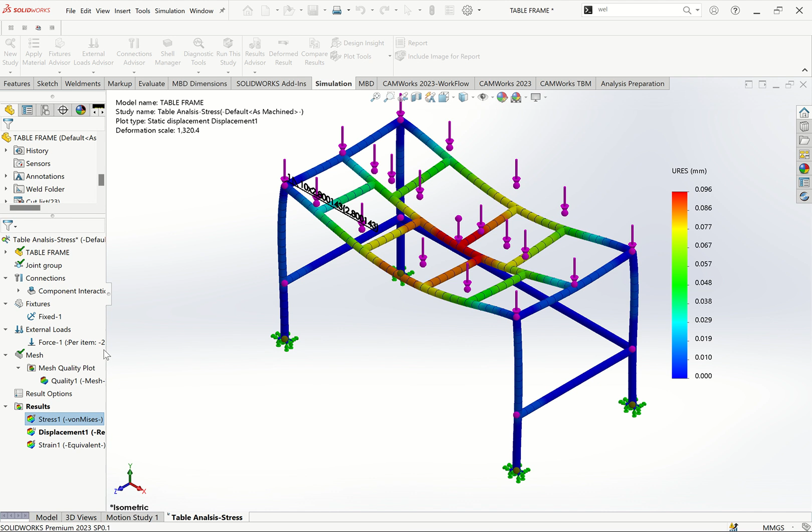But I can do this in the results - I can edit the results of the stress analysis and say give me a true value, using a true scale. Then okay, also for stress analysis displacement, edit definitions, I can say I'm using a true scale so it updates the values to show the true result. I put true scale.

So in case I want to show displacement here, I can show stress and strain. Then I can come to strain and say animate. Now according to the true scale, it looks like this.

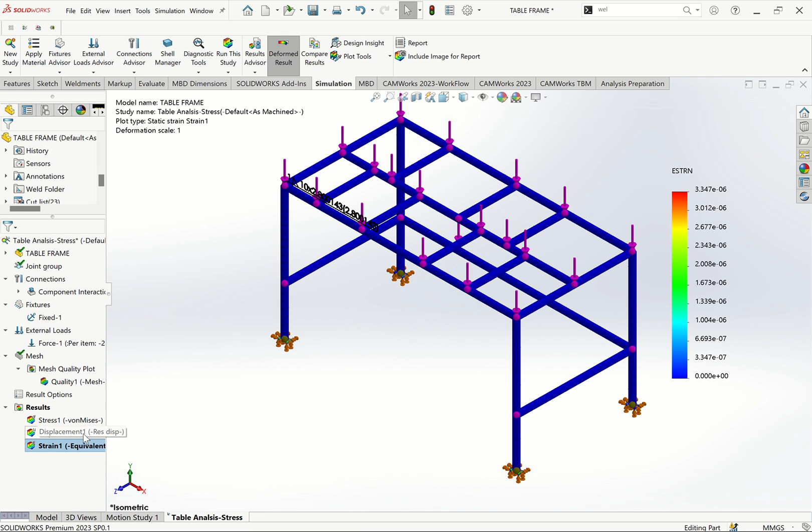If I go to displacement, same thing, show, then animate. You see how it behaves, how the forces and displacement are distributed. Now I've assumed this is a true scale. That's how we're able to do stress analysis using von Mises.

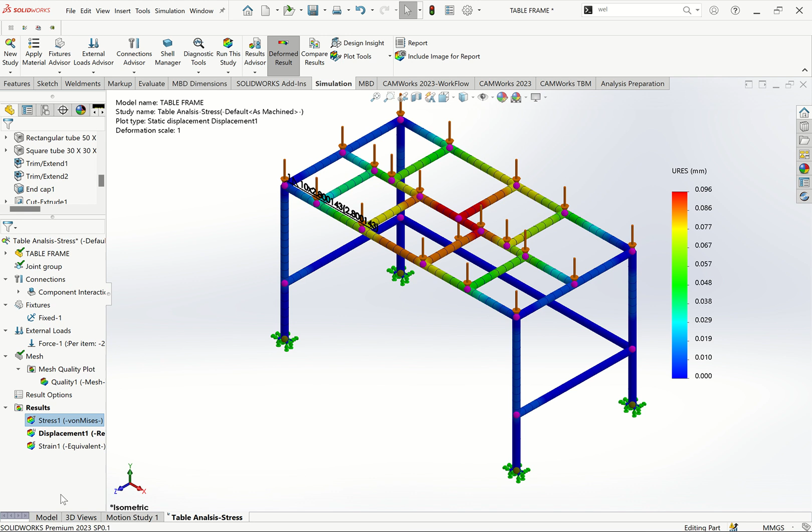So our main objective was to create a weldment frame using SolidWorks, using 2D sketch and 3D sketch. From there we were able to do weldments using these parameters, as you see, all of them are here. From there we did stress analysis using static analysis, showing how stress, displacement, and strain are related using von Mises with the standard mesh.

Okay, so this is what we have covered. In case you want to learn more, you can book classes which show you how to get engaged with using the Weldment tools. As I said, you can also do welding in SolidWorks, so this was just for the purpose of introducing welding.

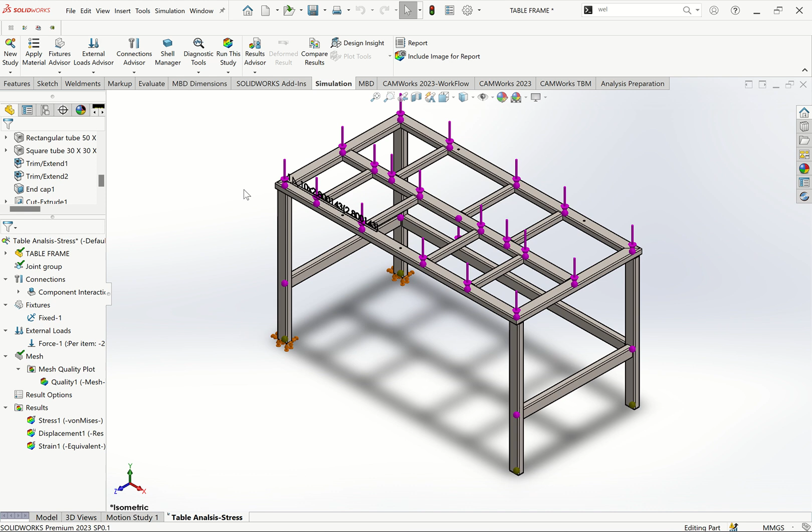So next session we'll be doing detailed design of structural components, then doing analysis like a water tank tower - how can we ensure that the water tower is strong and doesn't have any failure points. Okay.